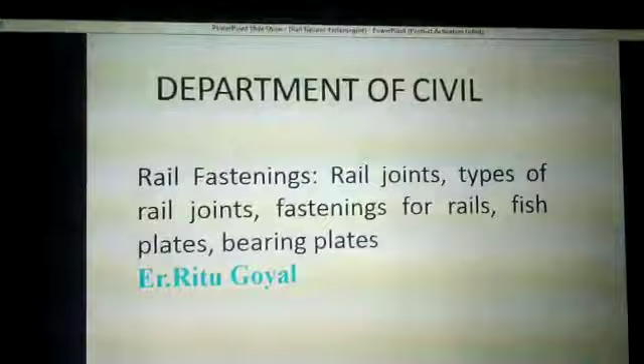It includes the different types of joints, fastenings for rails, fish plates, and bearing plates, which are required so that they can provide stiffness to the rail track as well as the rail gauges. So, first of all, rail fixtures and fastenings. All the fittings which are used for linking rails end to end and also for fixing rails to the sleepers in the track are known as fixtures and fastenings.

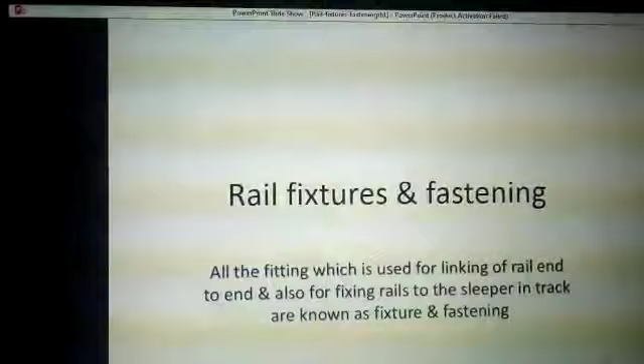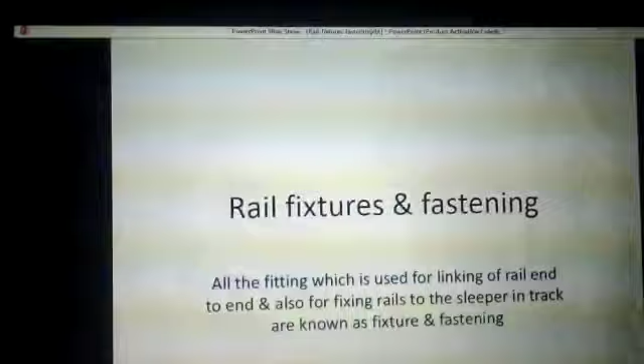This is a very important aspect, and the design, size and shape of the rail fixtures is very important, because any loosening of the fixture or wear and tear of the fixture or fastening which has been provided, if it occurs, can dislocate the rail gauge from the track.

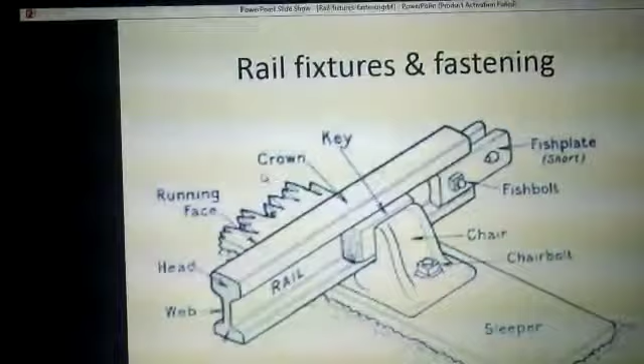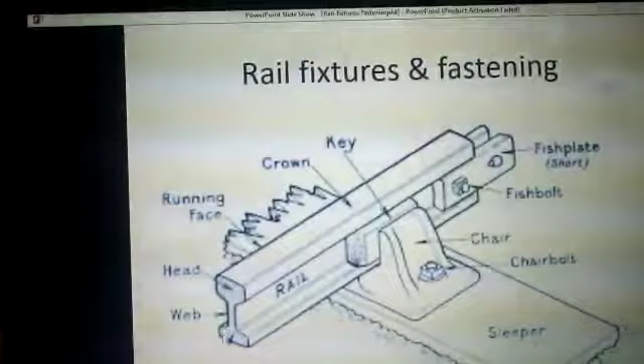So this is the picture showing the railway fixtures and fastenings, in which it can be seen that this is the point where the crown of the rail is provided. This is the rail, this is the head, this is the web, and this is the foot, which has been provided to give lateral stiffness or lateral stability. This is the chair, which is connected to the sleeper with the help of the bolt.

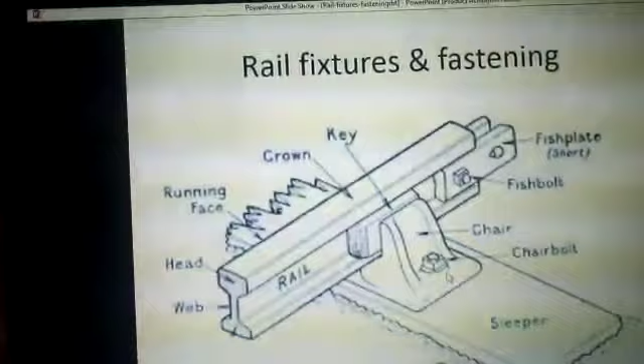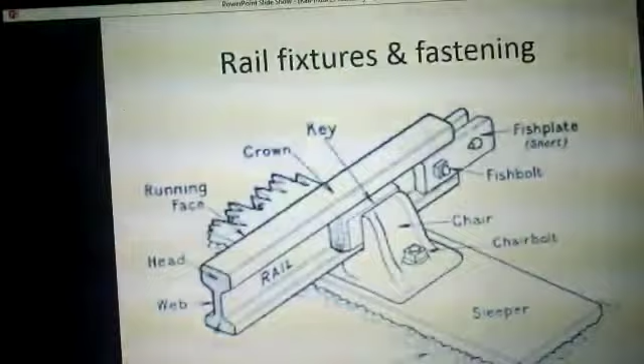Here is the fish plate, which is fastened with the help of the fish bolt, so that it can get stability in the longitudinal direction. So the types of fixtures and fastenings which are provided are the fish plate, bearing plate, chairs, spikes, bolts, keys and cotters, anchors and anti-creepers.

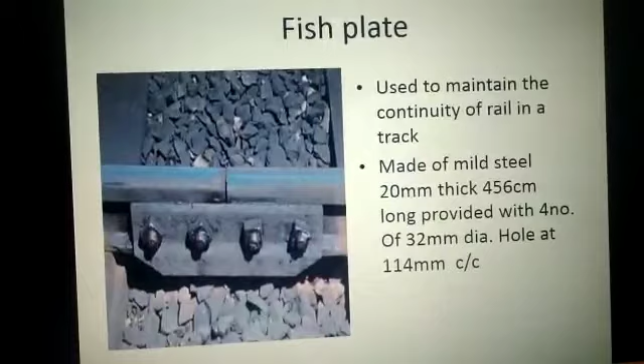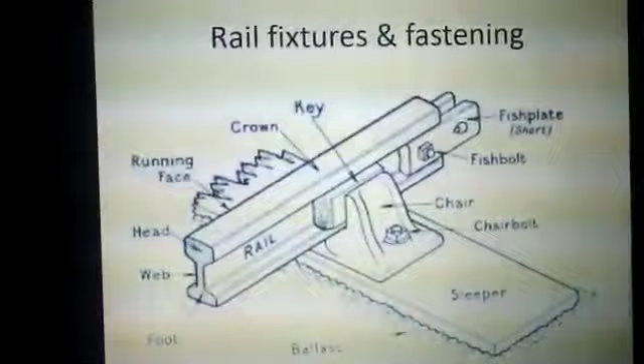This is the picture showing the fish plate. This is used to maintain the continuity of the rail in a track. It is made of mild steel, 20 thick and 456 long, provided with 4 holes of 32 dia at 114 millimeter center to center. Earlier I showed you the picture of the fish plate, which is located over here. This was the fish plate, and this is the wider view of the fish plate, which is provided with the help of 4 bolts.

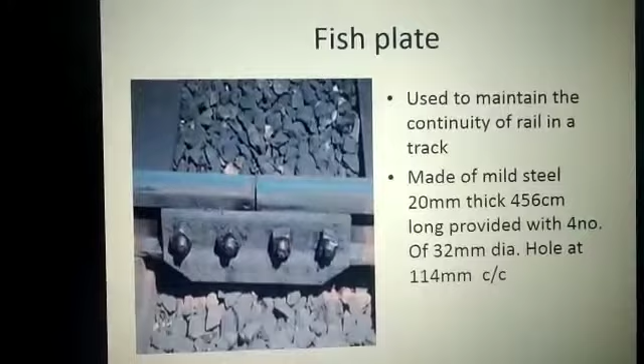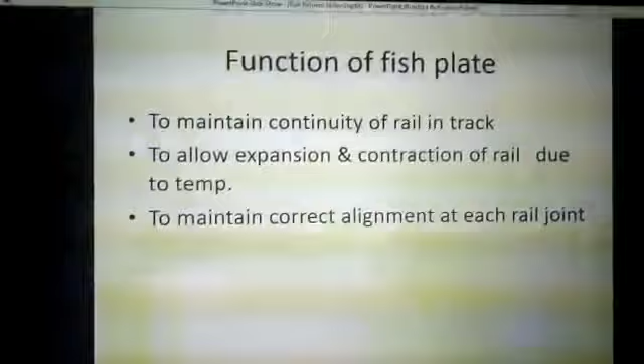The function of the fish plate is basically to maintain the continuity of the railway track and to allow the expansion and contraction of rail due to temperature, because if any expansion or contraction takes place, stresses are induced, so it will try to withstand the stresses. It also helps to maintain the correct alignment of the rail joint.

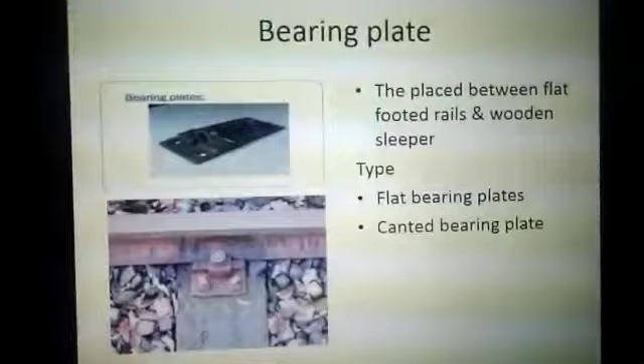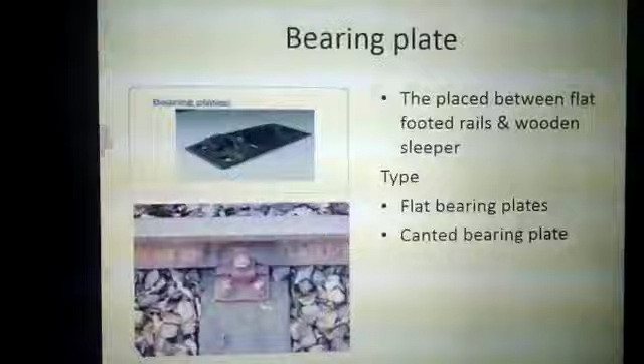This is the picture showing the bearing plate. It is placed between flat-footed rails and wooden sleepers. Two types are available, that is the flat bearing plate and the canted bearing plate. This is the bearing plate which has been shown. This is a flat bearing plate and this is a canted bearing plate.

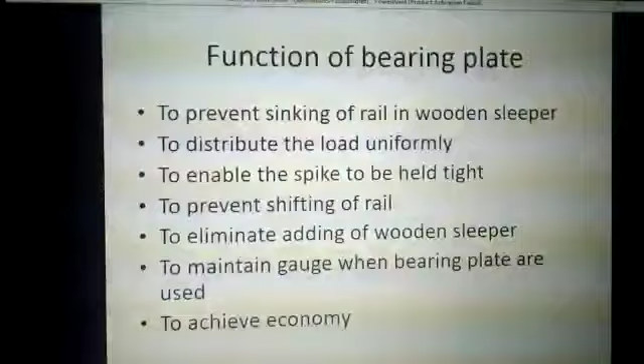The function of the bearing plate is to prevent the sinking of the rail into a wooden sleeper. It helps to distribute the load uniformly, and also it enables the spike to be held tightly, otherwise it can dislocate. So it prevents the shifting of the rails also. It helps to eliminate addition of wooden sleepers, and also it can be used to maintain gauge. So overall it helps to achieve economy.

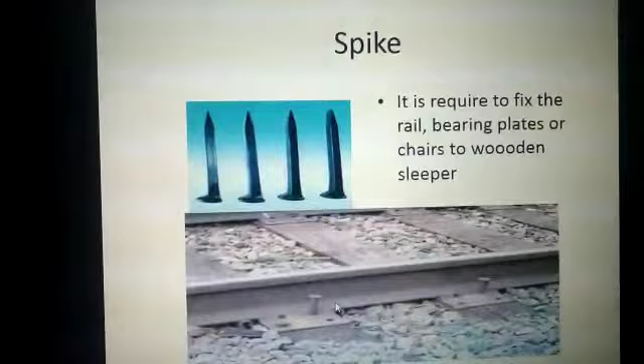These are the spikes which have been provided, which we can see here in this part and this part. They are required to fix the rail, bearing plates or chairs to the wooden sleepers. So the requirements of a good spike are that it should hold the rail or the bearing plate in a proper position. It should be easily fixed and removable. It should not come out due to vibrations. It should be cheap enough.

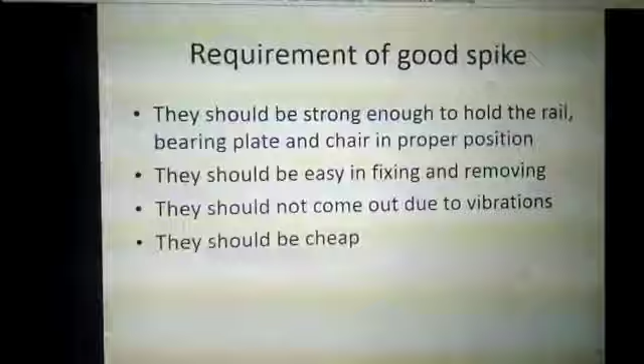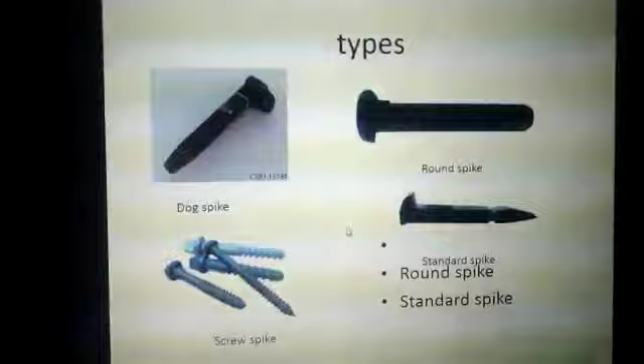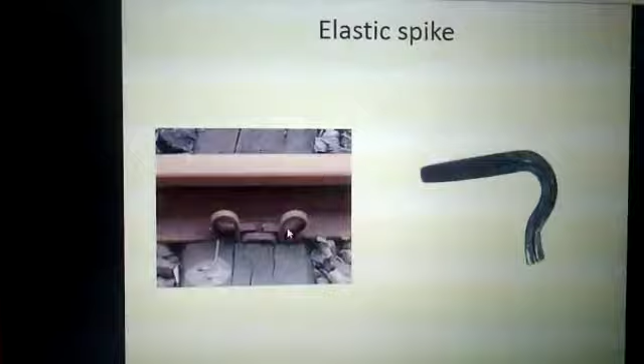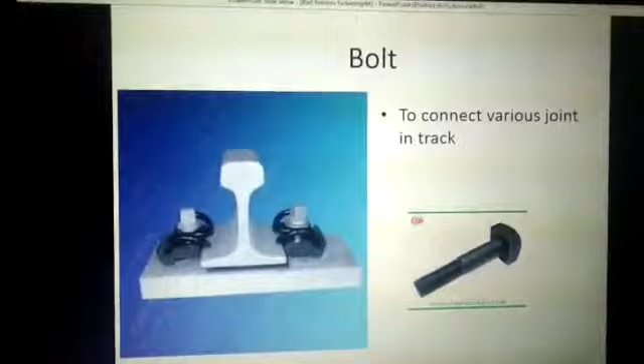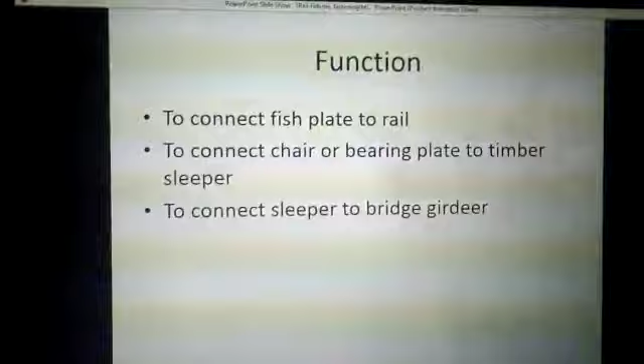And these are the bolts. As we know, to hold the rails with the sleepers, bolts have been provided. The function of the bolt is to connect the fish plate to the rail, to connect the chair or bearing plate to the timber sleeper, and to connect the sleeper to the bridge girder. So wherever fastening has to be done, the bolt has to be provided. The different types of bolt are the hook bolt, fish bolt, and fang bolt.

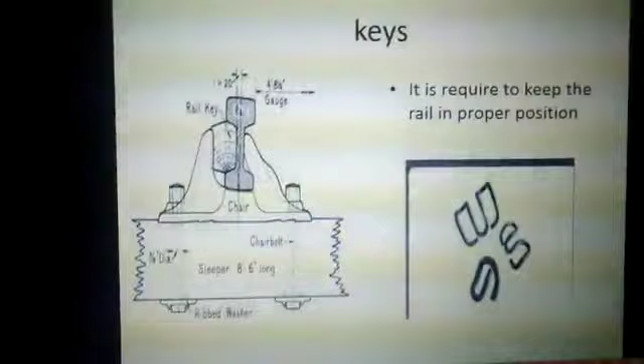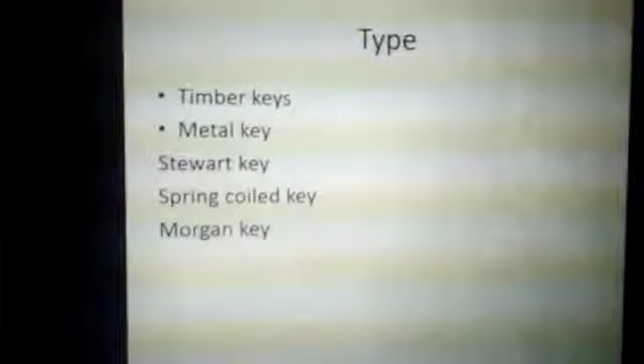These are the keys which are used. They are required to keep the rail in a proper position. So each and every fixture which has been used is used to keep the rails in position. The different types of keys are timber keys, metal keys, Stewart keys, spring coiled keys, and Morgan keys.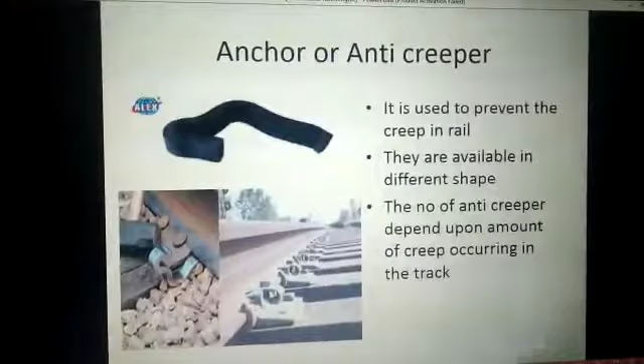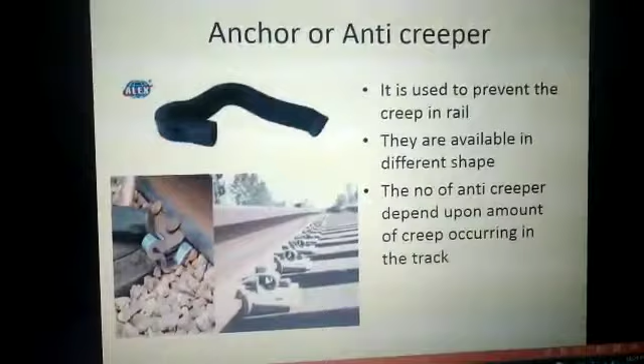The anchor has been provided so that it can prevent creep in the rail. Creep is basically caused when the train is moving on the rail track; even when the load is removed, the rail continues moving and causes some change or deflection in the railway track. So that is basically called creep. Anchors are available in different shapes. The number of anti-creepers depends on the amount of creep occurring in the track, so they can be provided according to the creep value.